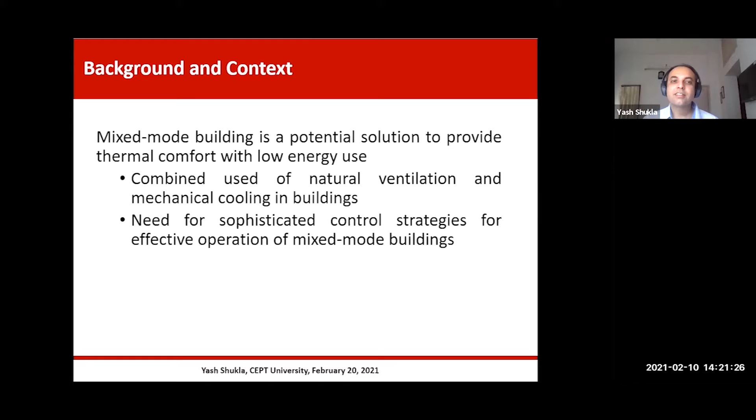And as I explained, it uses a combined use of natural ventilation and mechanical cooling in buildings. And what we have found is that while we have historically seen a lot of these strategies, in the newer context, in the modern context, there needs to be a sophisticated installation strategy as well as a sophisticated operation strategy for effective operation of mixed mode buildings. And there needs to be a lot of work that needs to be done to help implementation of these strategies.

So let me start with the concept of adaptive thermal comfort model. Through our historical research, we have found that we don't have to maintain a constant indoor temperature in buildings, especially in various parts of India.

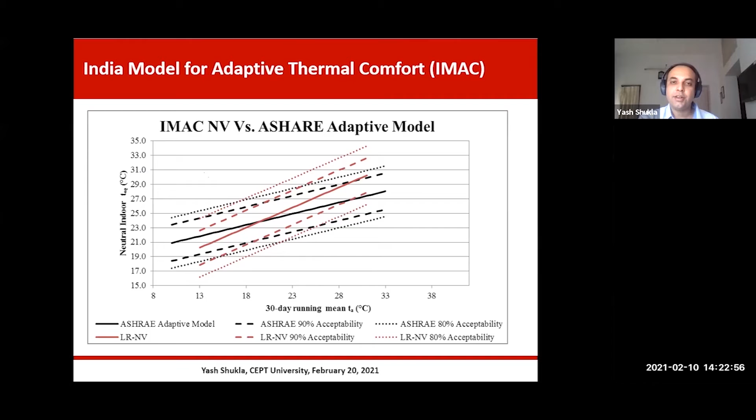Now, if you allow a little wider band to be maintained inside the building, you can actually maintain a slightly higher temperature, as high as 29, 30 degrees, and as low as 17, 18 degrees, where people still feel comfortable. So how does this help?

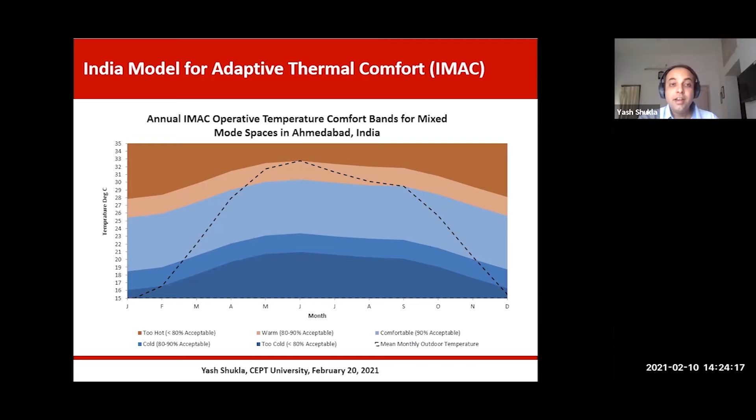The looser the band, the more flexibility is allowed inside the building in maintaining temperature conditions, giving more opportunity for designers to integrate different strategies inside the building. This is why the adaptive thermal comfort model, and the India model for adaptive thermal comfort, is very good for application in Indian residences.

However, there are times, as shown by the blue bars, when you cannot operate the buildings using natural ventilation throughout the year. There are periods when you will need active cooling systems to operate, and at that point you will have to rely on active air conditioning systems such as mechanical cooling.

That's why you need a mixed mode ventilation and cooling strategy, so that whenever outside conditions are comfortable, you use natural ventilation during that orange bar period, and whenever outside is not comfortable, you start using an active air conditioning system.

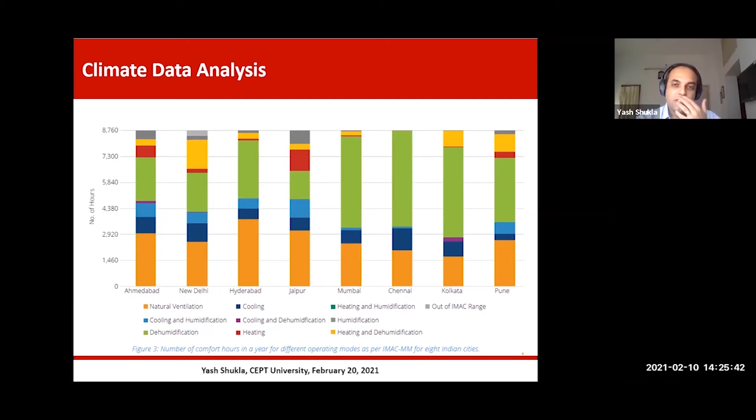Once you do the climatic analysis of your city, you first try to find out what your opening sizes should be in your residences. Then you actually do a ventilation rate analysis, calculating the outdoor air flow rate you need in your building.

In your bedrooms and spaces, you need to remove the heat generated by those spaces. So even though outside conditions are comfortable, you still need sufficient airflow to come inside the space and take away the heat. That's why you need to start thinking about designing the openings of your windows.

If I want 75% of those hours to be used in my building, what should be my airflow rate? That's the first part in deciding what the airflow rate design should be for the city that I'm building my residences into.

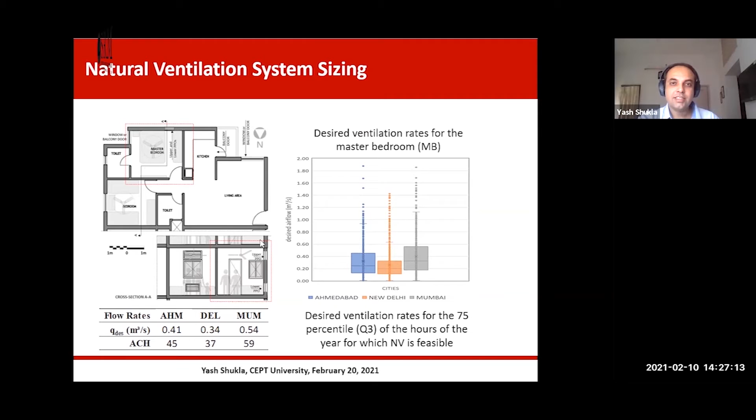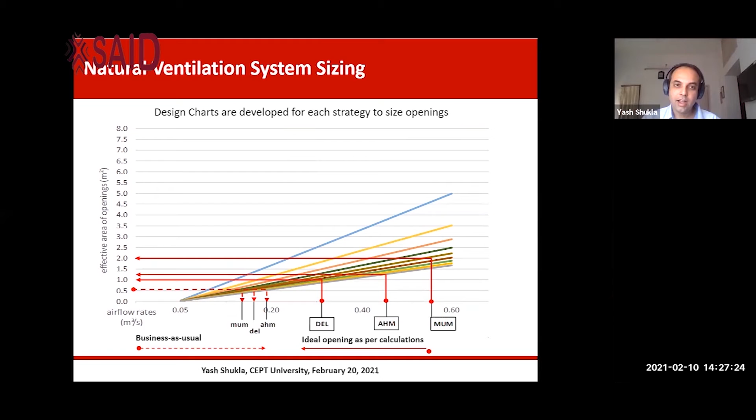Once you decide what your airflow rate should be, there are design charts given for each strategy to size the opening area in your residences. On the x-axis you have the airflow rate you would like, and on the y-axis you see the effective opening area you need. This helps you decide the area you need to design for your city.

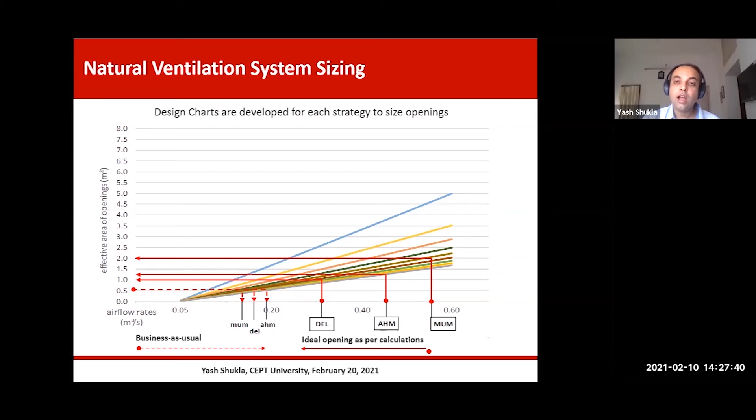In Mumbai, Delhi, and Ahmedabad, there is a line which shows the business-as-usual area we observed in our research, and what would be an ideal opening area we need. From 1 to 2 meters square of opening area is needed to provide sufficient quantity of air for ventilative cooling, to provide sufficient cooling in the space.

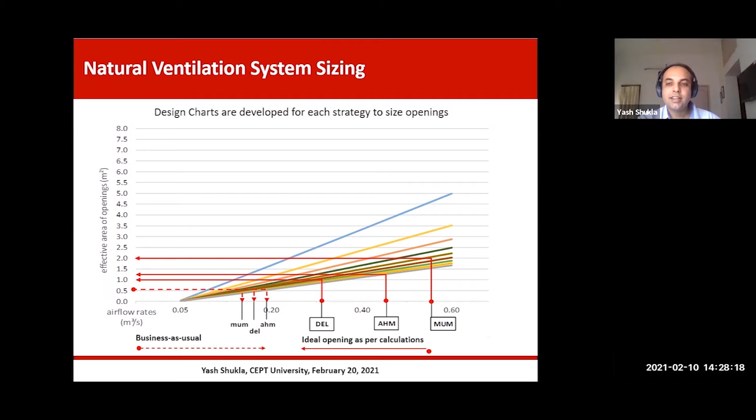So this is where you start. Once you design and understand the climate, you decide the airflow rate, then you go and find out and identify what area I need in my residences.

Once you know the area, you start designing your specific window and openings. Depending on the type of window you have, whether a sash window, a single balcony door you're planning to use for ventilation, or a casement window, your actual effective opening area will vary. So accordingly, you can size it, and depending on the design of your residences and spaces, you can select what window type you need.

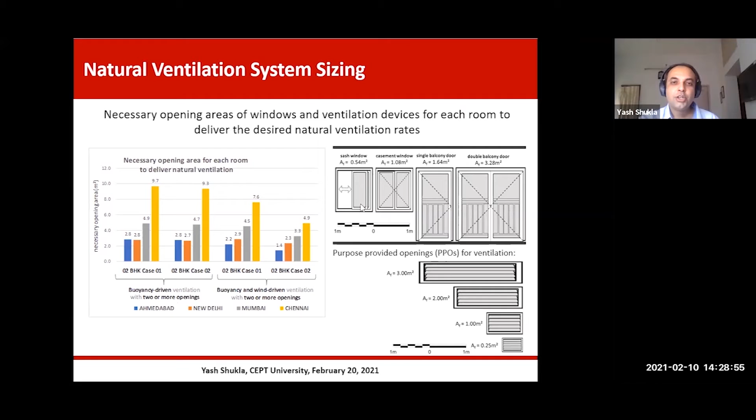But all you need to worry about is that my total effective opening area should match the area that I have identified in the earlier step.

Once you have identified the opening area, the next step for your residences and ventilation cooling strategies would be to decide what strategies I need to integrate with my natural ventilation. Once natural ventilation is designed, you need to think about how to use mechanical cooling systems when outside is not comfortable, how to integrate the both, and what would be my mixed mode operation.

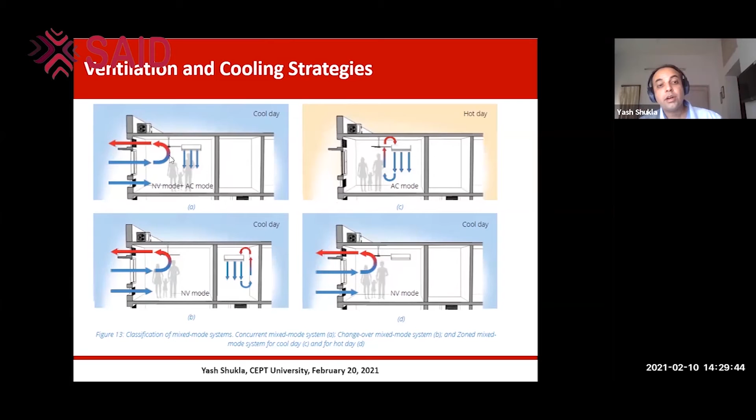This slide shows different ways of operating your building. The first, A, is a concurrent mixed mode, where you operate natural ventilation and air conditioning together, or on a hot day you turn off the windows and just run the air conditioning system. The other strategy is a zoned mixed mode.

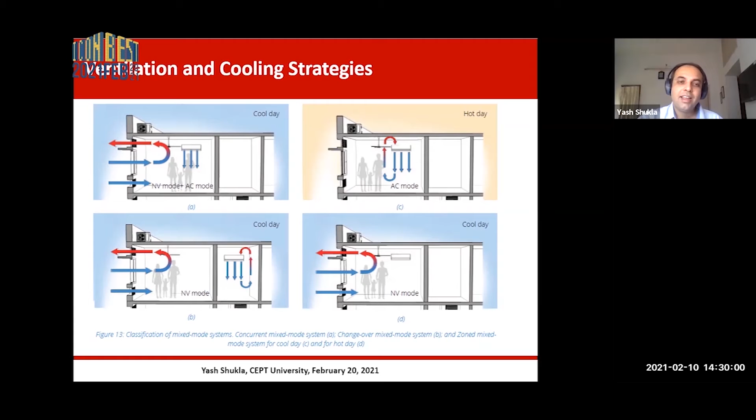In a zoned mixed mode strategy, you divide your building into zones: an interior zone where you continuously operate the air conditioning system, and peripheral zones where you can still take advantage of natural ventilation and continue to operate in natural ventilation mode. So B shows a zoned mixed mode design.

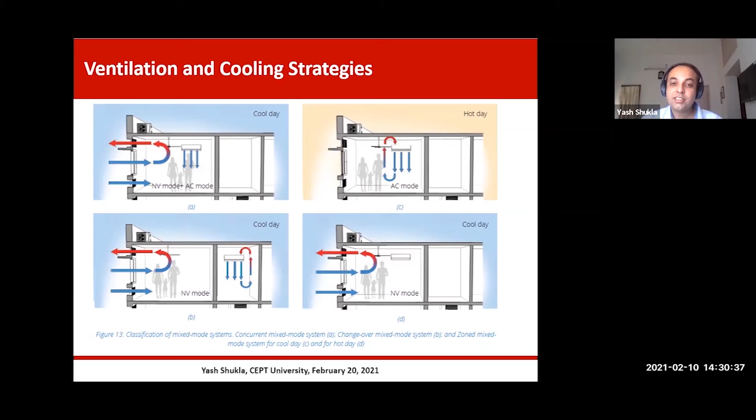Depending upon your building strategy and design, you can start designing your ventilation cooling strategy and select what mode of operation you want for your building.

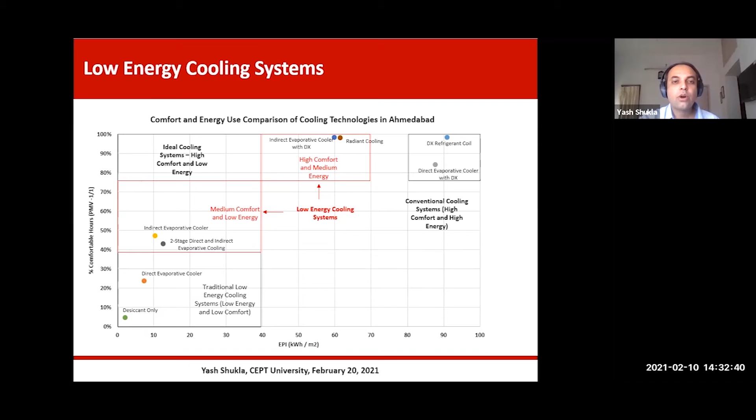When we start going into a more hybrid system, we can achieve medium comfort with low energy, using indirect evaporative coolers or two-stage direct and indirect evaporative coolers. You significantly reduce energy consumption but also reduce comfortable hours, so there's a bit of uncomfortable aspects brought into your space. There are also systems providing a medium energy reduction while continuing to provide high energy, high comfort. So depending on your application, you select where you fit in terms of comfort, how much compromise you're willing to make for occupants, how adaptive they are, and accordingly select the appropriate low energy cooling system.

Now relating that to energy impact: simulation studies show that if you use an India model of adaptive thermal comfort in your design, you can achieve 15 to 30% energy savings for all system types. So it's not only selection of AC or a low energy cooling system, but how you operate that makes a significant impact on energy savings. Using an adaptive model allows you to operate at a higher indoor temperature while still maintaining comfort, achieving 15 to 30% energy savings.

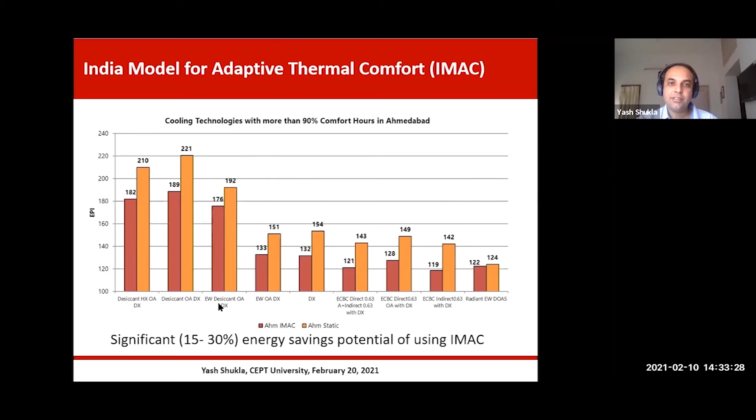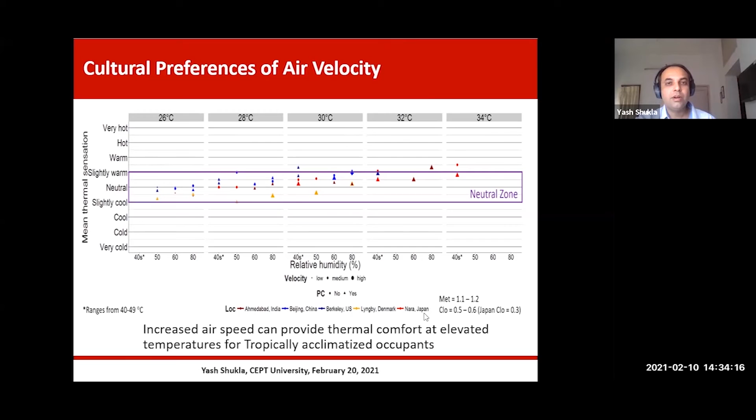Another important strategy widely used is air velocity. We've found that occupants in India and tropical places, tropically acclimatized occupants, prefer higher air velocity. During our studies of thermal comfort in our comfort chamber, we found you can maintain a slightly warmer temperature with higher air speed and still keep people comfortable. So increased air speed can help maintain a slightly elevated temperature for tropically acclimatized occupants. This is a strategy we should definitely use in residences and all buildings throughout India.

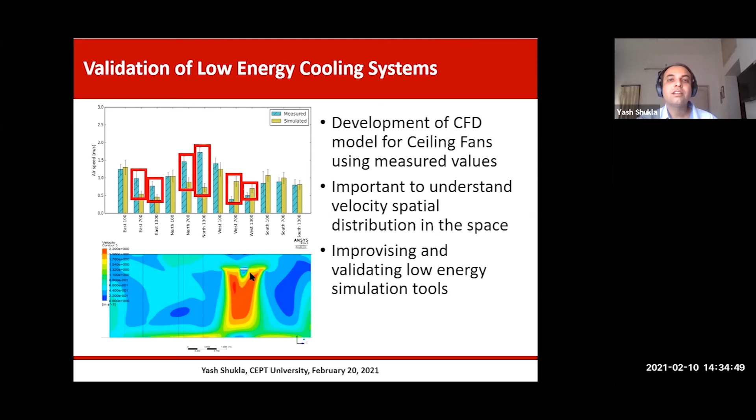As part of the research project, we've done extensive validation of these strategies. We developed a CFD model for ceiling fans using actual measurements, which helps validate some of the low energy simulation tools. This is important because when we provide inputs to professionals, we utilize this knowledge to make more robust estimates of the savings, the benefits in comfort, and the benefits in energy savings.

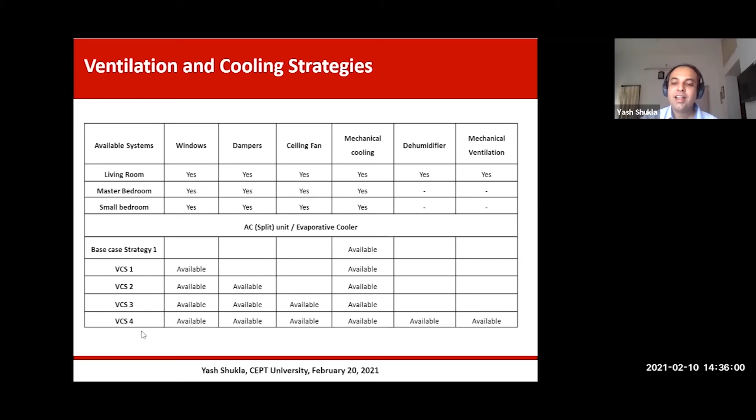For example, if you only have a window and mechanical cooling, you'd use a simpler strategy of ventilation and cooling, strategy one. But if you have all the components, you'd go for a more complex operation, ventilation and cooling strategy four. All these strategies have been built into a control architecture, because ultimately how we operate these components after designing determines our energy savings, performance, and occupant comfort. So we've spent tremendous time looking at the control architecture and different control algorithms that should be used for mixed mode buildings, and what that control would be.

It would control the first selection of mode, whether the building should operate in natural ventilation or air conditioned mode, or whether it should continue to operate in mixed mode, and then control each of the components, whether we should turn off, close the window or keep it open, or turn on the ceiling fan, as well as operate the system set points. Integrating all that into the control strategy is what we are proposing as part of this research project.

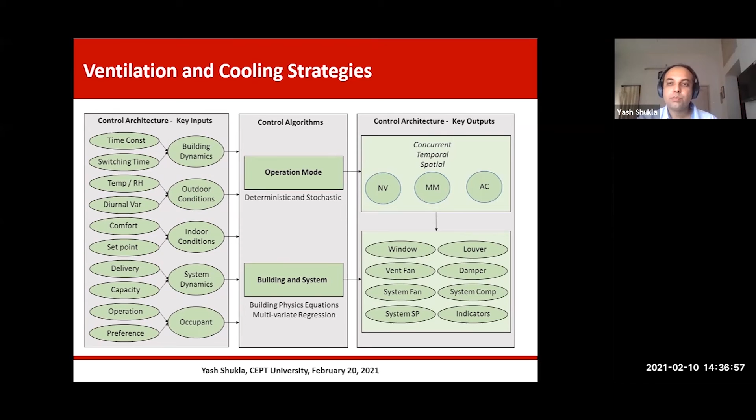We have done an extensive validation of these strategies using CFD simulations and an experimental chamber. This is an experimental facility that has been used to validate these strategies and control algorithms. It's a state-of-the-art facility located at CEPT University.

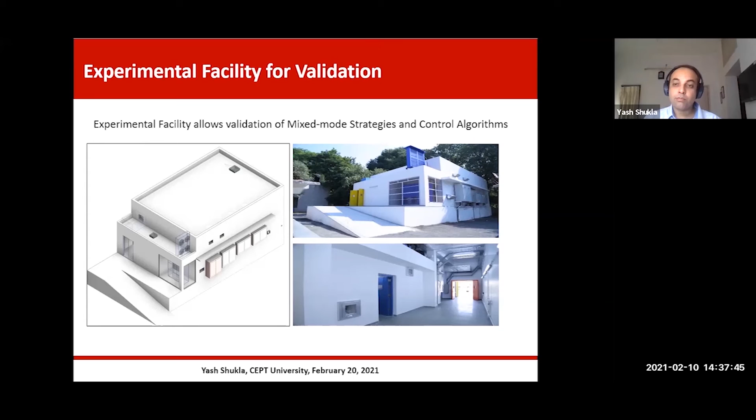You see in the bottom picture here there is a room within a room concept, with an outside room and an indoor room. In the outside room we maintain outdoor conditions, and in the indoor room we maintain indoor conditions. In between, we operate these natural ventilation dampers to assess how effective the strategies we are proposing are.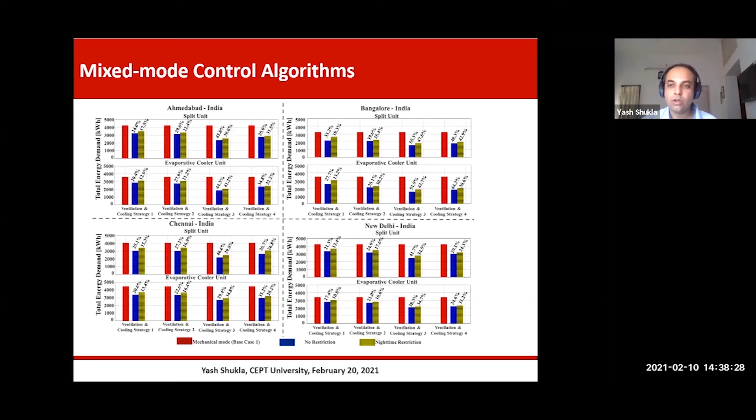Using those strategies along with validation experiment results and a simulation model, these are the results we have found. If we do the analysis for 4 cities - Ahmedabad, Bangalore, Chennai, and New Delhi - you will see that by using different complex strategies, we can increase the saving potential from 24 to 35 percent. So more components you have, more opportunities you have to save energy, and it works in all climates. You can save energy even in Chennai, New Delhi, Bangalore, and Ahmedabad. So in a very diverse climate, you can achieve significant energy savings.

So what are the key conclusions of this research project? We found that mixed mode control strategies and well-designed buildings can provide 12 to 55% energy savings across different climate zones in India. That's why it's important to now take it and apply it, using the help of architects like you, in real buildings.

We have also found that there is a good agreement between simulation and experimental results, which has been validated in our validation chamber. So we can say that the strategies we are proposing as part of this research project are very robust and can be used in the real world with good confidence.

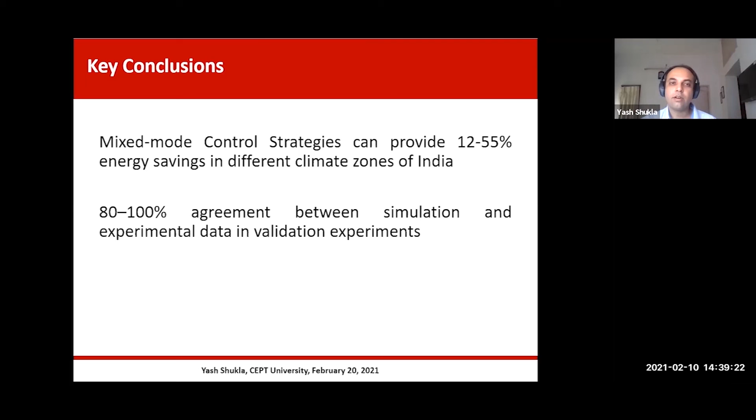With that, I thank SRM Institute again for organizing this wonderful conference and for inviting me to the event to share our findings from the research project.

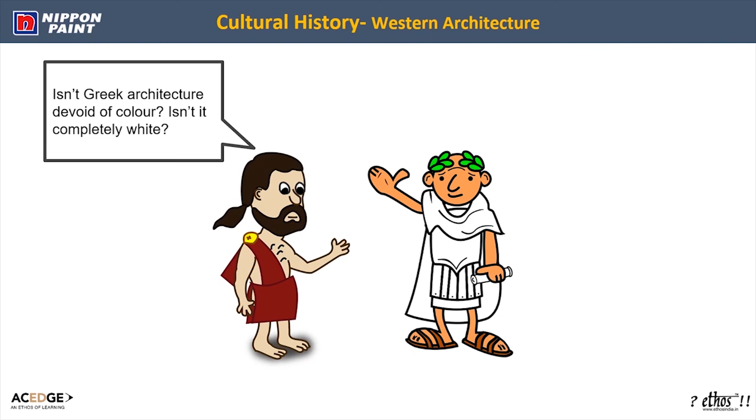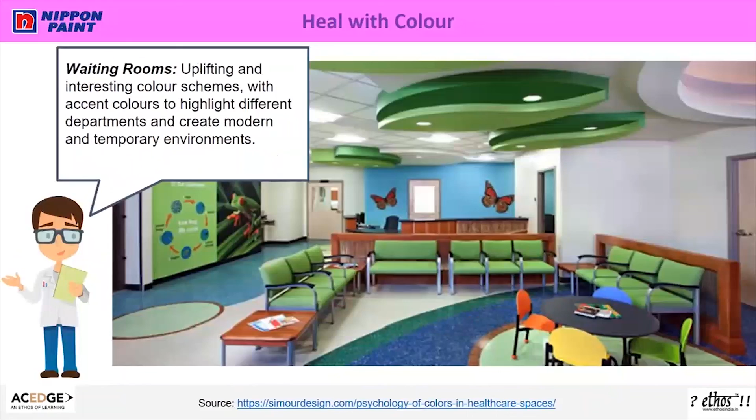Welcome to the course Color Psychology. The first module, The Background of Color, will give you an overview of multiple perceptions in color. We will learn about the scientific background, I have scientific proof that white light is composed of 7-component colors. Understand basics of color theory. Take inspirations from colors in nature. Context matters, you know. Teleport to different time zones to get historical perspectives of color. Is Greek architecture devoid of colour? Isn't it completely white? And finally, dig deep into the human mind to get psychological perspectives of color. We will then go on to explore color in various spatial typologies of architecture and interiors. A transition from theory to practice would happen in the last module on practice and application of color. The journey would be immersive with fun quizzes and activities along the way. Join us in this colorful, fun-filled journey. Hey!